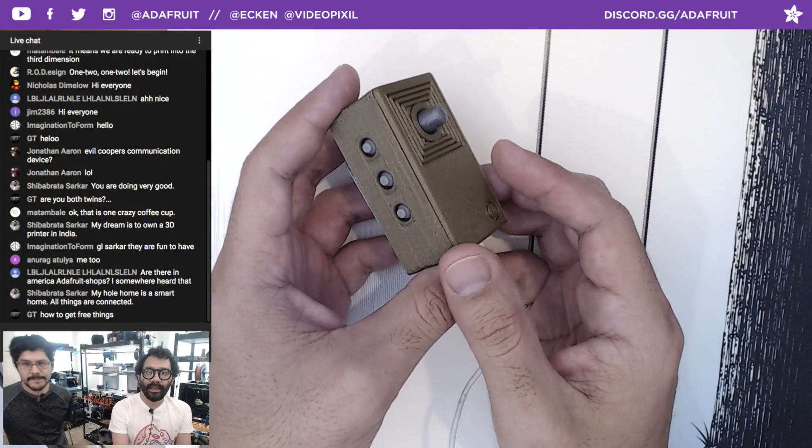So after we drink our coffee, let's go ahead and get started with this week's project. This was a lot of fun. Working on it till the 11th hour. It's one of those projects, yeah. So super fun project for this week. It is an MP3 player based on the Feather. This cute little guy is based on Gordon Cole's hearing aid from Twin Peaks.

We have access to our play, next, and power on button, as well as a slide switch. We have access to the SD card where all the storage for your music is held. And then on the bottom here, we have the headphone port and the USB port for recharging and for programming. We have a potentiometer on the top here so you can control your volume, and a nice little status LED on the bottom here to show the play status.

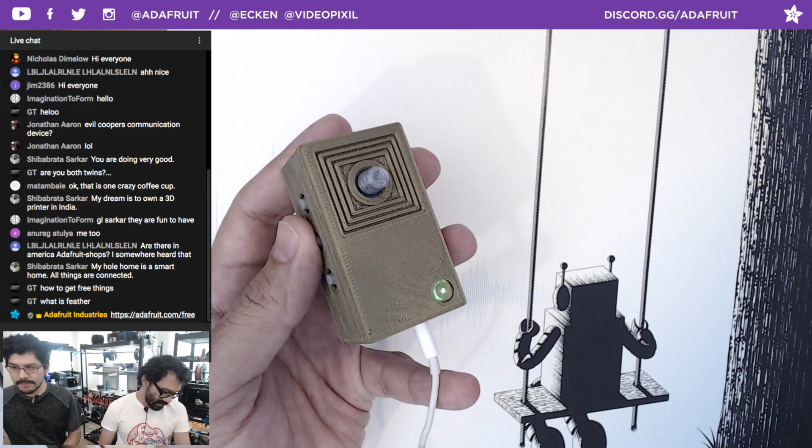So I really love this project because it's a nice little wearable, and what a coincidence, it's I think the 15th anniversary of the iPod. I know that Lamar has made MP3 players in the past, but with our new Feather line, this thing is so tiny, super cool. You can kind of hear if I hold up the headphone to the microphone here. This thing is so awesome. Wearable, nice little clip on the back here. Of course, we'll go over the design details for that. If we take a look inside.

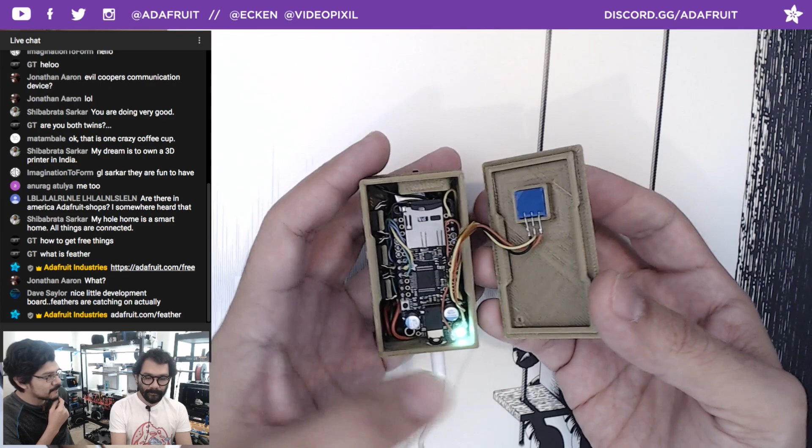For those who don't know, Pedro, what is a Feather? So the Feather is our brand of Arduino compatible microcontroller. Cool thing about this one is that it works with our brand new CircuitPython library as well, which is super cool because you can program everything by just loading it on your computer like a USB drive. So there's no need for an external compiler. It's all just text that you type in to program it. Although this one is not running on CircuitPython, it's all done in regular Arduino code just because of the speed that is required for playback.

That's right. Nice portable, built-in USB charging, built-in JST for batteries. It's very nice. It's a nice little platform. Yeah, so... Oh, look, Jim says I switched to Feathers and never went back to Unos. Yeah. So the Unos are a little bit bigger. They're about credit card size, a little bit bigger than that.

So like I was saying before, we have the play functions on the side here. The pause will give you the nice little status indication on the LED. You can hit the on and off button here, which is like play and stop. And then skip track right there. So everything is nicely contained inside this little tiny enclosure.

We have standoffs on the bottom here that are holding the Feather M0. And then right on top of that is the music maker shield, this guy right here. We have an SD card slot. You can store all your music on there, and a nice little way to hold all your buttons on the side, as well as the lid that is holding the potentiometer on there for the volume control.

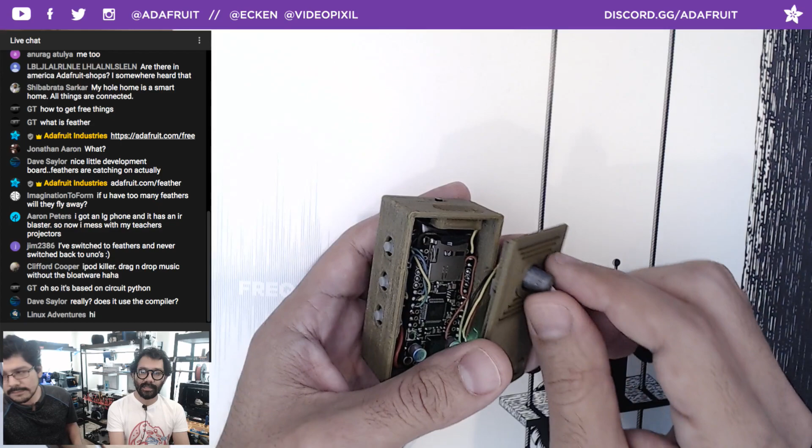Yep. Just to clarify, it isn't CircuitPython yet. No. But it is CircuitPython compatible. This was developed by Carter Nelson, who might be in the chat room. He's definitely in the Discord chat room. Yeah, this is all his idea. He came up with the design and the programming for this. I just made a pretty box for it.

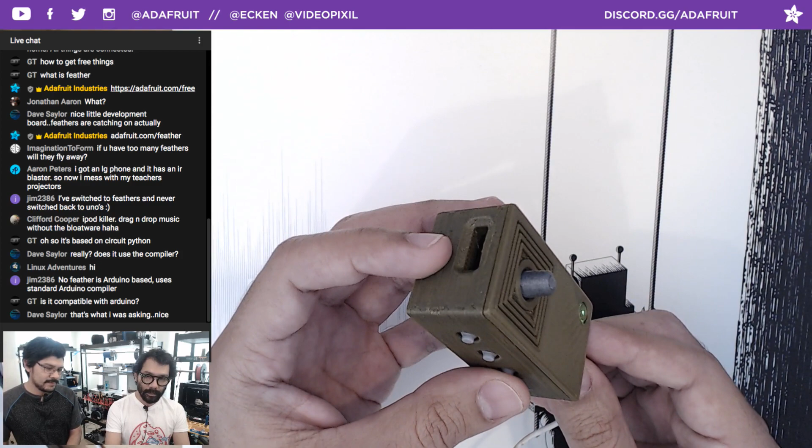Yeah, but he developed it in Arduino C, using the VS1053 library, I believe. It's the VS1053. Okay, yeah. So you can get all those details in the learning guide, which we have over here. So if you want all the details on all the components, how to set up your Feather with the Arduino IDE, how to set up the libraries and stuff, all that is thoroughly documented in our tutorial here, so you can check it out.

So like Pedro's saying, the overview goes over all of the details that you want to take a look at, including prerequisite guides, like the M0 Express. Every one of our products has a detailed guide that tells you everything about it, all the pinouts, how to power it, how to assemble it if it requires assembly, and how to set it up with CircuitPython, so you can get that started.

So some of the parts that were used, obviously the Feather, the music maker, which fits on top of the Feather, some headers, some female headers, potentiometer, external storage, so a micro SD card, a couple buttons, a switch, some LEDs, and a little LiPo battery, the 110 LiPo battery. So check that out. Those are all the parts you need. You can source them out yourself if you'd like, but we have them all over here and on the sidebar and listed here. So let's talk about the 3D printing part, since this is our realm.

Not a lot of pieces to put this together. Yeah, super simple to put together. It's just a nice little enclosure with the clip on the back, and then some replacement caps for the potentiometer. You have access to the Fusion 360 file, which we'll go into a little bit later in the show, and then just the little parts on how to orient your print. You don't need any support materials for this one, in the case anyway, because of the way that it's designed, which we'll touch base on in a little bit.

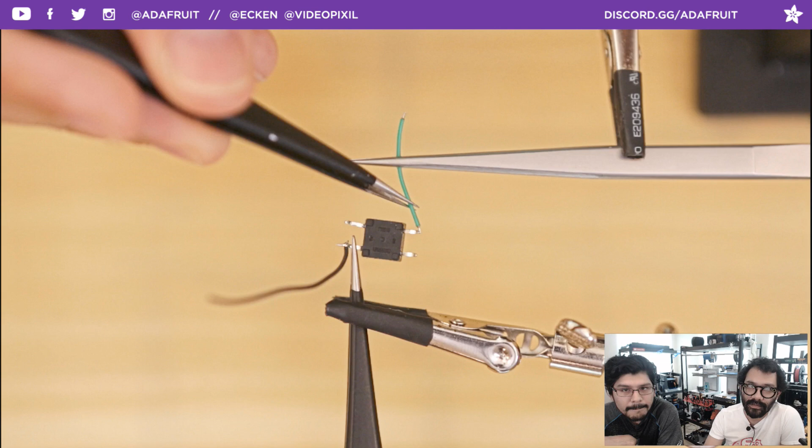If you're new to the learning system, you can click on any of these photos and they get bigger. So if you can't really see, just click on the photo, and then you can click on the original right there, which is pretty big. Probably should have done that when we were close to one of the boards so you can see all the pins. Well, you've got the circuit diagram too, for orientation.

After that, we can start connecting all of the grounds to the ground rail that we have on our prototyping area. Again, super handy to have all that space. If you needed other wires, you could attach them to make more connections on that prototyping area to extend even more pins. So super handy to have.

After that, we can start setting up our slide switch, and as mentioned before, we have all of the lengths required to reach the mounting spots inside of the enclosure. So after we've soldered the headers on, you can still piggyback off those, and I'm just connecting to the bottom there to get my enable and my ground pin. This is going to allow us to switch the whole circuit off while we're charging, so we're not wasting power. And if you have time, heat shrink tubing.

Next one is inserting into the case. So this is actually one of your designs for mounting the slide switch into enclosures. It features 3 walls that hold it together, and then a slight cutaway inside of the wall. You can't really see it in this angle, but you'll have a nice little protrusion, so you can easily get to the slide switch. I like how tiny that little guy is. And then we switch back over.

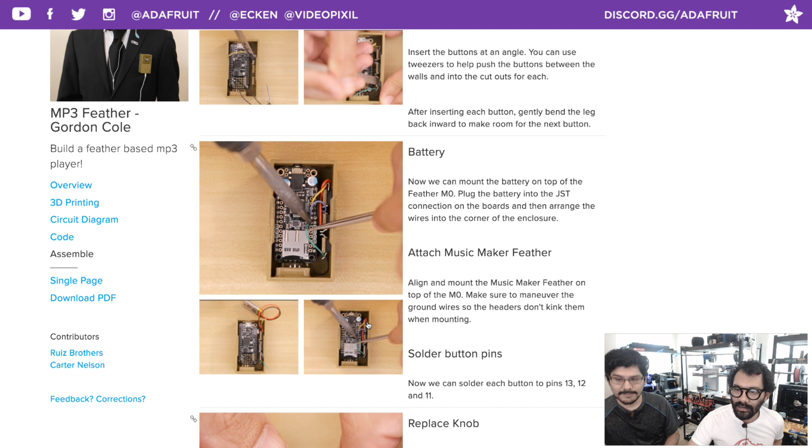Exactly. Once all those IOs are soldered up, we can move on to modding the potentiometer, which is pretty much just ripping the... I didn't think you could pop these out, so that's kind of neat. Neither did I until I tried. So we got a nice little 3D part that we can fit over that. You are going to need to switch it out just because of the thickness for the lid. You won't be able to access the stock cap that comes on that knob. So we'll replace that, and of course for the colors that we want to use as well.

And then we'll just solder all those guys up. Super easy to do. What's nice is the Music Maker has all those broken out pins, so you can access all the pins that are beneath it, right? Yes. Yeah, so that's nice.

LED status. We got it. Yeah, so for LED status, instead of using a regular 3mm LED with a resistor hooked up to it, we can use something even smaller. Surface mount for the win. LED sequins have the resistors built in, so you don't have to add any additional bulk to them. And they're so small, I didn't even really need to design a mount for this because the wires that are hooked up to this are actually a little bit heavier than the entire sequin itself. So this just pushes up against the enclosure to mount it very securely in place. And that's just going to act as our status.

Do you have a photo of that? Yeah, it's right there, after I mount it. Oh, right, because you got to mount this guy. Okay, cool. Following after that is the potentiometer, and there is a top and bottom for this. When you look at it, there'll just be a little bit more space on the bottom where the pins are, so just align that as shown in the picture there. And you're just going to want to gently bend those forward so they're nice and flat. They're not hitting. Oh, okay. Yeah, you're right. Cool. And just do a little bit of wire management there.

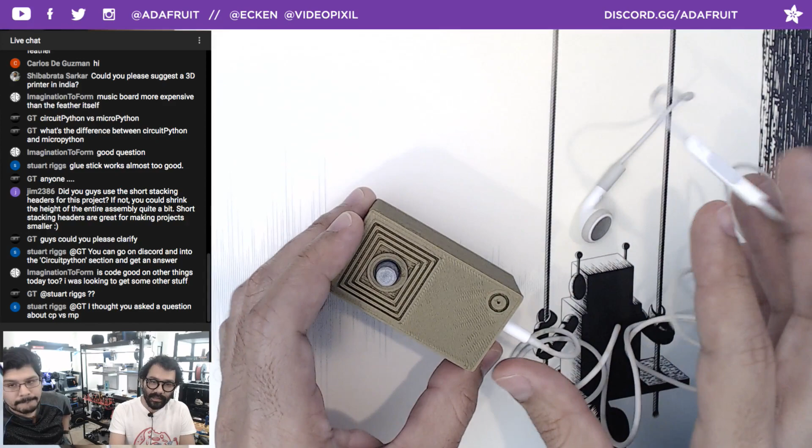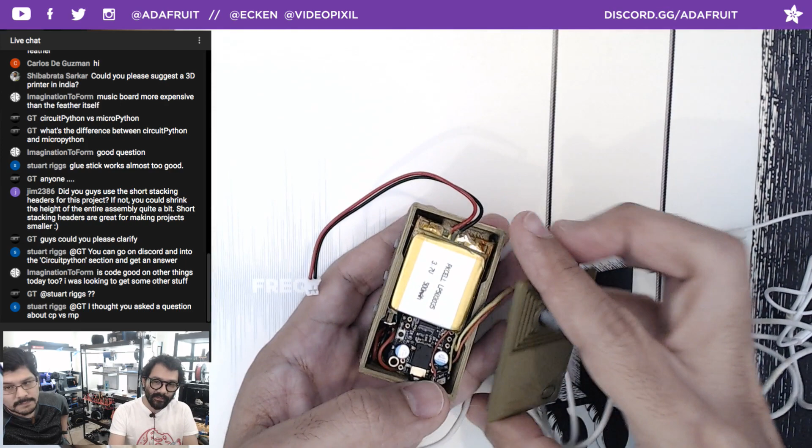So I fire up the CAD software that we use. You can get all the download links for the STLs or the Fusion files, which we should be looking at here. Super simple design. You can go through the entire timeline to check out how all of the parts were designed. All sketch driven, so if you want to update any of the dimensions, you can just type in the numbers and everything should scale with it, meaning all the holes, the mounts, everything should follow along any of the edits. Yep. Not user parameters. I didn't do that, but I thought we did. No. I thought I put a gap in there for the tolerances. Anyway, what do we want to look at?

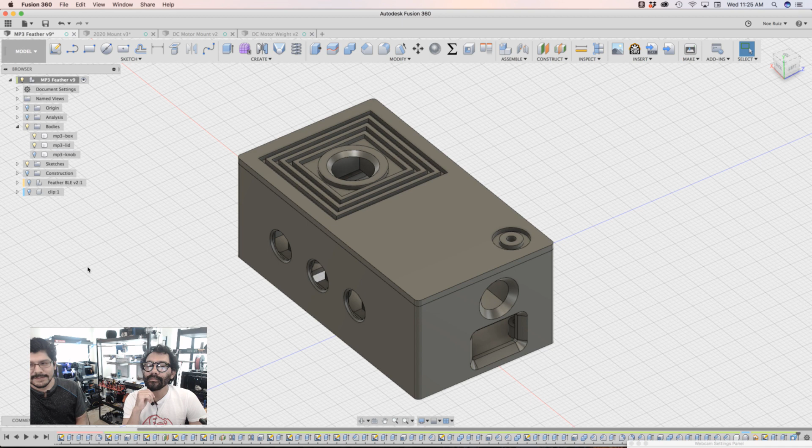The section analysis? Yeah, if you take a look at the section analysis, this is what I was talking about in terms of the way that the little holders are being held. It's like a spaceship. And there's the little chairs, and this is the window for the spaceship right there. Yeah, so that's a little cutaway that actually pushes it in just a little bit forward to the wall so you can get the protrusion for the tactile buttons out of there.

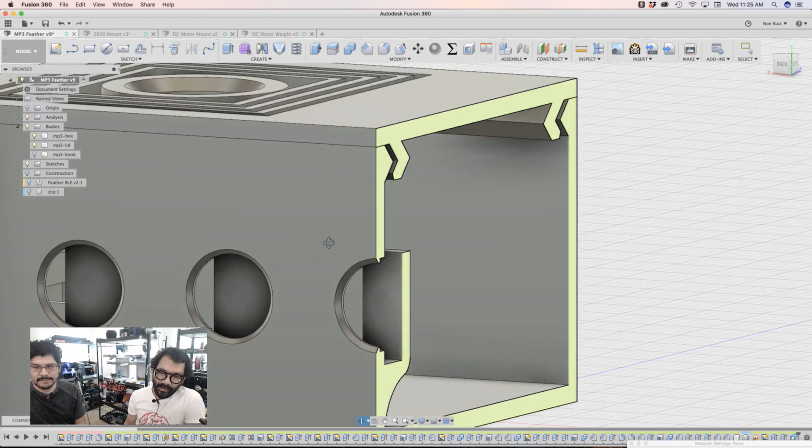I also like that you had to thin this out here, this and this, so that you can have more access, closer. See the little indent? That's what I'm talking about. It also holds the button in place. Yeah, that's the cutaway for that. And then that's also the technique we're using for the slide switch. Yeah, so that right here protrudes a little bit there as well.

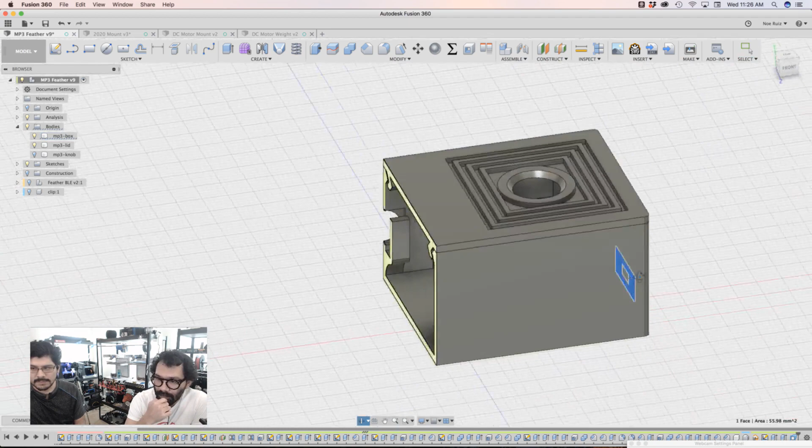And the challenge with that, can we take a look at how thick that is before this guy? Yeah, I think we can. Flip or add a new one here, like this. We can get in there. Just so we could take a look at what the minimal wall thickness is for 3D printing this on FDM.

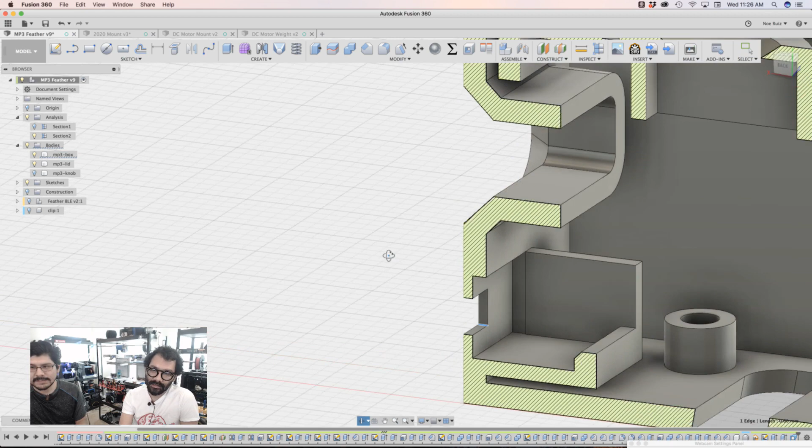0.6 should give you enough room for it to, you can't notice it, nice and sturdy, and you still are able to cut into the actual wall. So a nice little technique there for getting components to pop out of the enclosure.

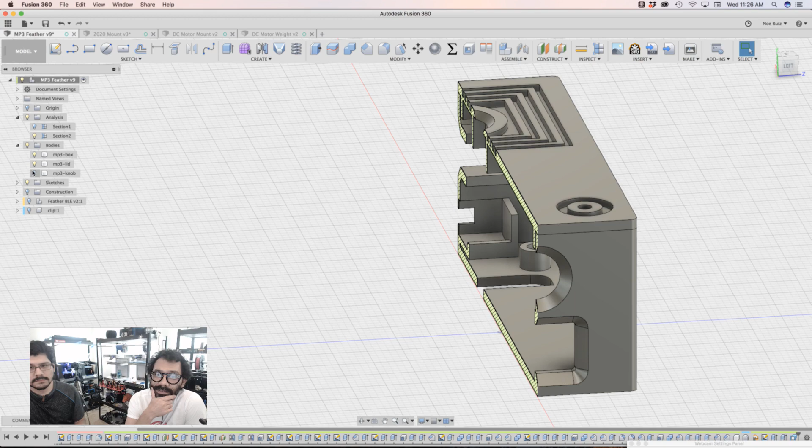Okay. The other thing we want to take a look at is a new way that we figured out how to actually make these snap fit nubs. If you can point to what those are. Yeah, so they're these guys here. Let's kind of get rid of this and reorient myself. So if you look at the case itself, you'll notice that there's these little nubs here on the side. See that nub there? It's like a little triangular nub.

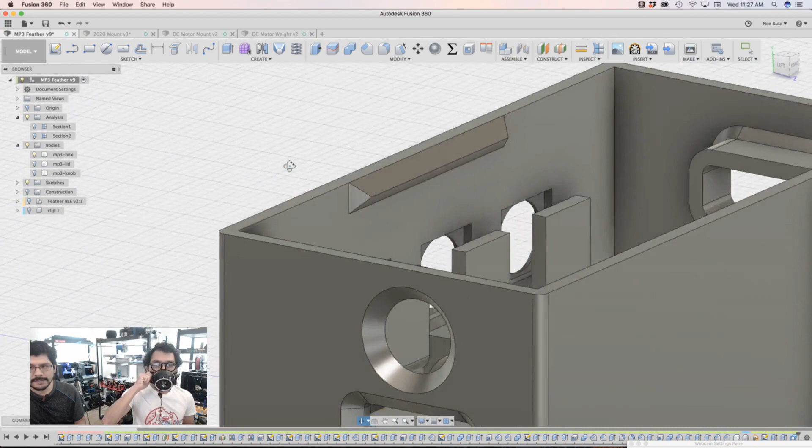And that nub there is actually optimized for 3D printing because it is at a 45-degree angle on the sides and on the top and bottoms. And then those are little nubs that lock into this lip that is on the lid. So if you look at the lid, there's a lip, obviously. This is what you normally would see, standard lip on the lid here, on the cover.

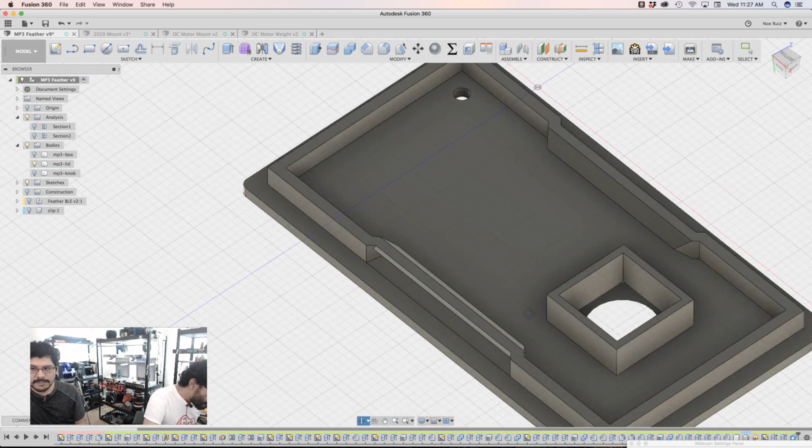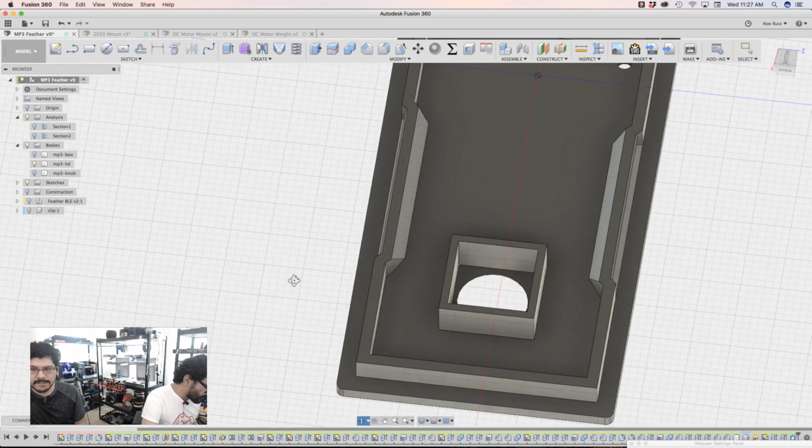And then we have this little triangular indentation, which actually is where the nub from the case snaps into. Well, in order to do that, you also need some material, some geometry to go on the inside of the lid. So you can see how this indentation follows this profile of this little nub here.

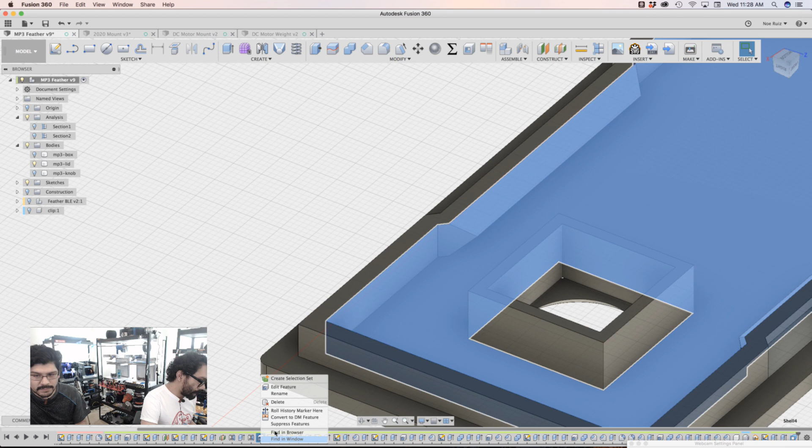So what's cool is that we learned how to do this. You can do this like 100 different ways, but the more you do it, the more ways you find to do it with less steps. So that's kind of what we did here. Really, I think one of the main steps is that you can actually apply a shell to the lid here. So I'll show you an example of what it looks like.

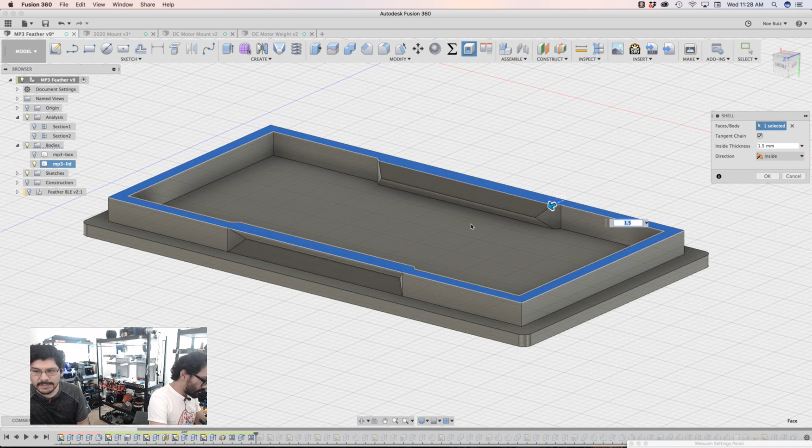So this is what we had, this little lid here. And it's fully solid here, right? This area here is fully solid. So you can just click on that and apply a shell. And Fusion's smart enough to create a shell and make the shell go around this geometry here. See the little indentation there? So it's really, really smart.

It's a better way than having to click on this, project a sketch, draw out an offset, extrude that offset, bring in more offsets to the inside here. It would take a lot of steps to make something that takes one feature. That is huge. And for everybody wondering, this is Autodesk Fusion 360.

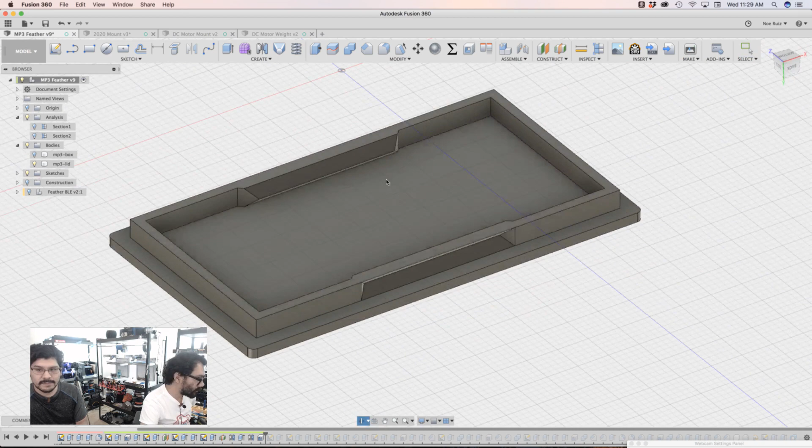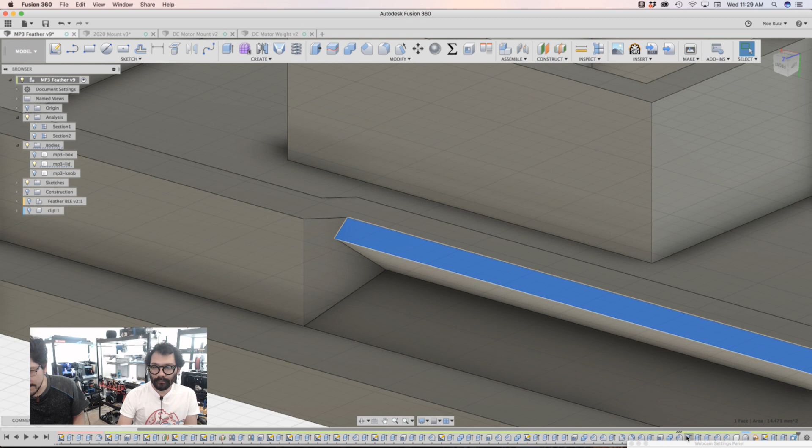So that was really fun to learn, because now I don't have to do 100 different things to make this. And one last thing is that we added a little chamfer here so that the nub can actually seat in here and lock into this indentation much easier. It's a small little chamfer, I believe it's like 0.6, 0.8. See that chamfer there? You just select that edge, apply a chamfer on both edges, and then you get this really nice thing.

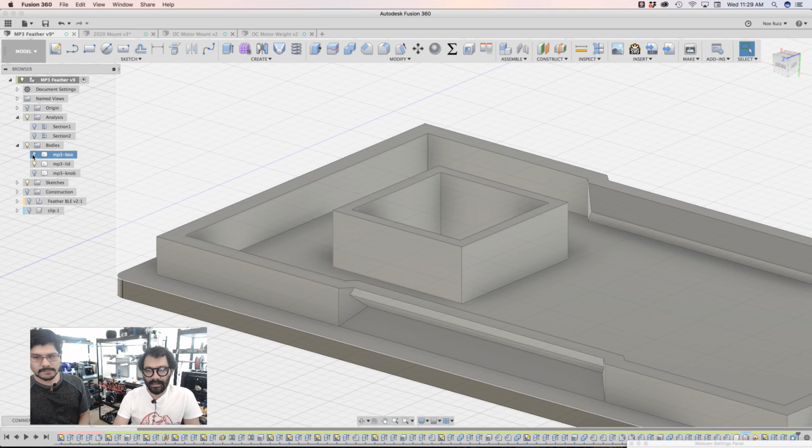Because normally what happens is when you snap it in the first time, a little piece of plastic kind of breaks. It's like breaking skin or something. First 1 or 2 layers always come off when you're snapping in the case. Yeah. So the reason we're using snap together lids is because the size of the enclosure is already starting to get restricting. Adding mounts for screws takes up a ton of room inside.

You notice that there's a really nice gap here. There's about a 0.8 millimeter gap, and that's just the tolerances that work well with the Type A machines. But they could be as low as 0.3, so you can change that if you want for your printer. It's all in the sketch.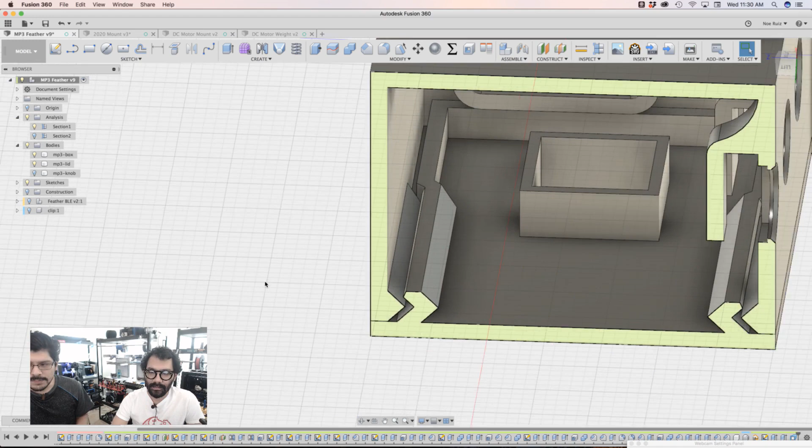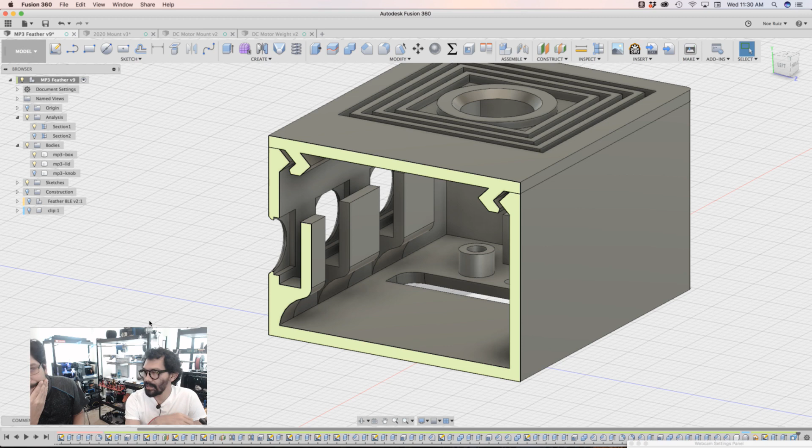So that's just a quick look at the CAD and this design. Hopefully this inspires folks who do CAD with some different ways to approach geometries and mounting features. Yep, you can always rip these features out for any of your own designs as well. If you go through the sketches, you can look at what the measurements are and redraw those to recreate in your custom enclosure.

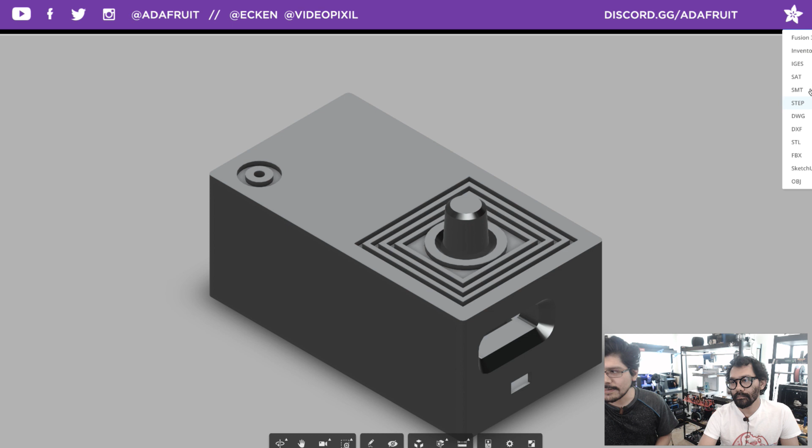You can go to 3D printing, and a lot of people don't know really, but it's over here. This link, it says download Fusion 360 source, and when you go there, it'll load it in Autodesk's My Hub thing, and then you can download it by this button up here. There's like 10 or so, SolidWorks, Inventor, SAT, STEP, DXF, STL, all the ones you like, OBJ, SketchUp. Google SketchUp, really? Wow. Pretty cool.

I like the explosion view feature. It always explodes.

Cool, so check it out. That's this week's project.

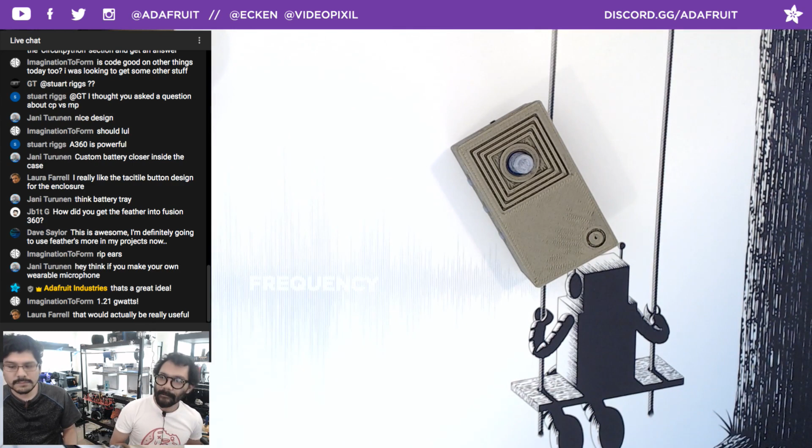All right, cool. Now we're going to take a look at Shop Talk. Yes. Cool. I got a Shop Talk. Hey guys, you know, ever since I saw John Park's pinball project, which is right here, I got interested in the stuff that he's using. So he's using slotted aluminum extrusion. If you scroll down to this product page, you can see John Park's pinball. If you didn't see that, check it out. He did a live stream on it and a full tutorial on it.

Basically used this 2020 extrusion to make the framing of this, and I've been thinking about doing something with it. So I finally figured out what I want to do with it. I made a hat holder. So what I needed to do was find out a way how to model this thing, and I was looking around on McMaster-Carr, which is this great hardware place that has all sorts of hardware and stuff. So I looked, and they did have some 2020 extrusions, and I imported it in, because there's a plugin built into Fusion that allows you to do that.

So I modeled this wall mount because I wanted to mount one of the rails to my wall and put hats on it, and it was wrong. It was the wrong size. I didn't know that. They're not all created equally. So even though they're 2020 on the outside, on the inside those little slots actually differ. So I was searching around, and I found on GrabCAD this gentleman here, Mark Kenworthy, designed, well, look at that, Adafruit 2020 extrusion profile.

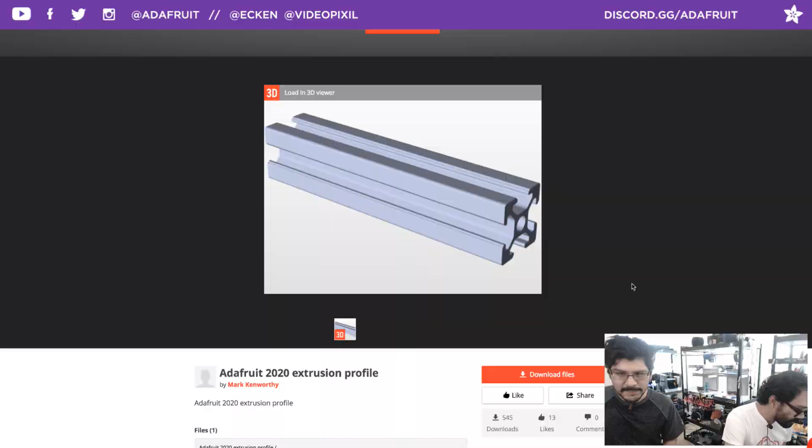So I just downloaded his file. It's actually a SolidWorks file, and I was like, "Oh, great, SolidWorks. There's no way that's going to work on my CAD package." Guess what? Fusion has native support for SolidWorks, which is awesome. So I imported that into my Fusion 360, and I made a little mount, which I'll show you now. This guy here. I imported it in the component, so this is the profile. The measurements are spot on. They are exact. So the diameter and all the slots are all perfectly lined up.

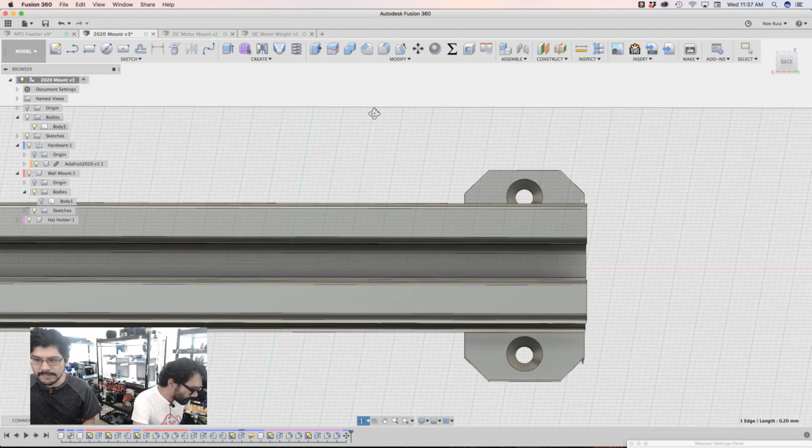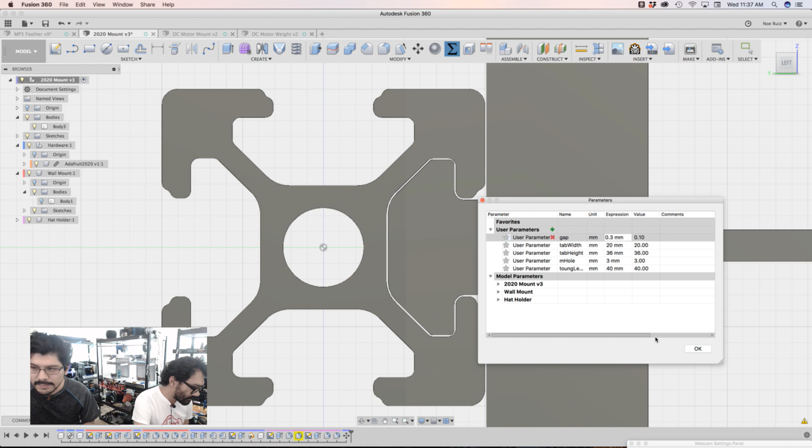So I made this little end cap piece that fits into the wall, and that's how it works. It just has two mounting holes, one at the bottom, one at the top. And then this area here is just a gap, so there's a little bit of play. I set up a little user parameter, 0.3, so I can adjust this. So watch me, if I put 0.1, you'll see the thing grow a little bit. And then if I put it back to 0.3, you get a better visualization. Obviously one of the fillets broke, but that's fine. Just switch that back. There you go, you can see the gap, so that's really important, to have a built-in tolerances user parameter.

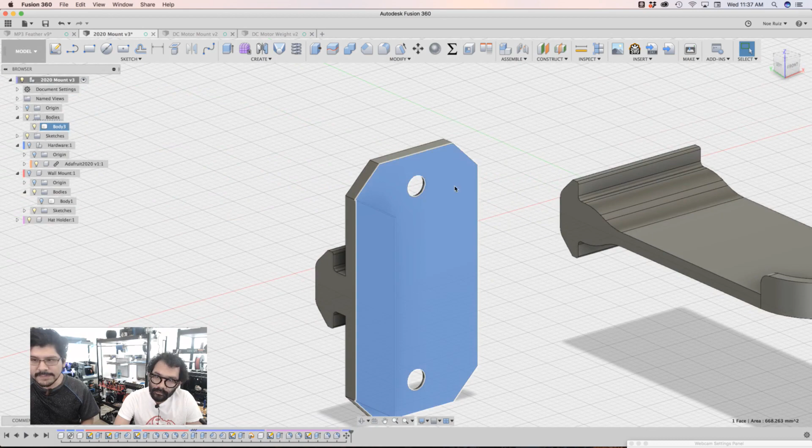But anyway, one of the tips that I found out is the way to print this guy, let me hide this for a second. The way to print this little guy here was, okay, if I print it flat on this side, I'm going to need support materials for these overhangs because they are 90-degree overhangs, right? Those are problems. So I printed it on this side, and so I have this weird flaky platform. You can see the thickness of this platform is 0.2 millimeters, which is one layer.

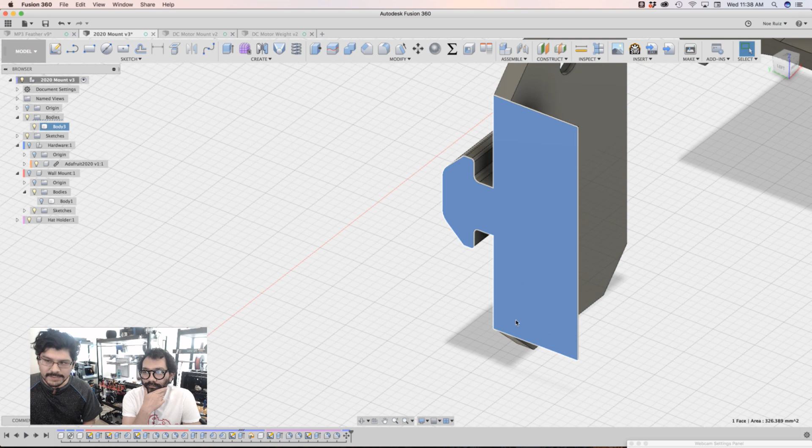So I made this kind of built-in support thing. I just cut it off. I just snap it away. And then I have chamfers here so that I have not too sharp corners. Could have probably put fillets, but it worked out really well. And I also did this little tongue thing for my hat holder, and it's using the same thing.

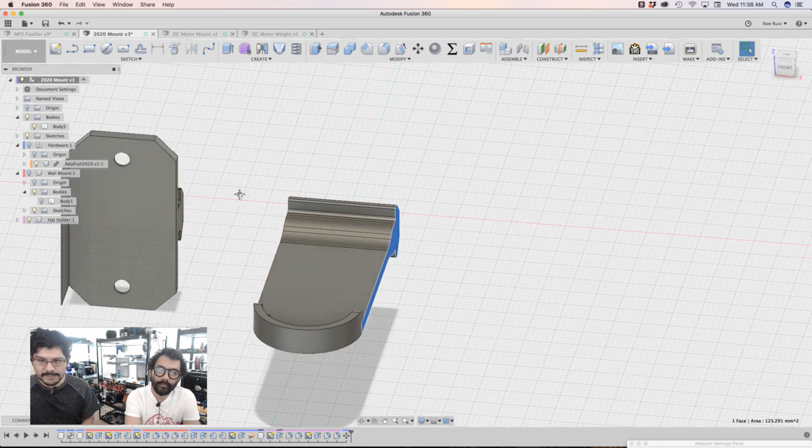I print it on this surface, and then this fillet here just prints out nicely thanks to the cooling fan on the printer. And that's kind of my two little practical prints that I made. So what does it look like?

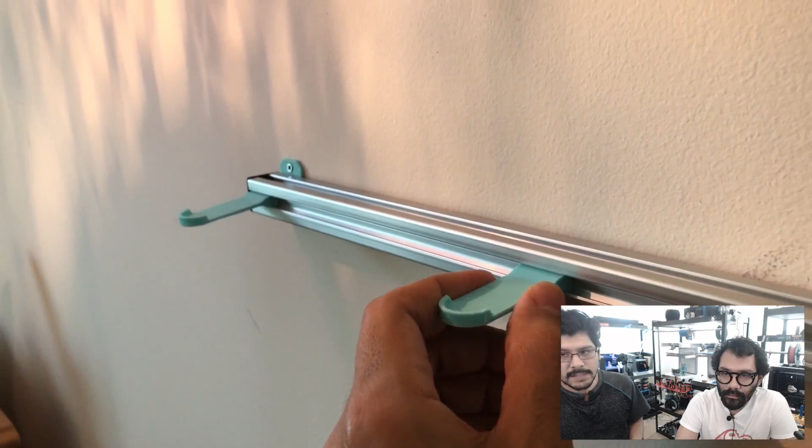It looks like this. So I mounted it to my wall with two wood screws. They're really small and they're pointy, so they kind of self-tap. And there's a little bit of play, so I can move these and slot them around. And I can hang my hats, I have a bunch of hats. And I was able to fit 4 hats there. And I probably want to do another one, so I have like 2 rows of them.

So I don't know, it's just kind of a practical 3D print. A little bit of Fusion work. Again, huge shout out to Mark on GrabCAD, who uploaded the profile, so I didn't have to spend too much time sketching out that profile for the 2020 extrusion, as it is a custom thing, I think. I don't know, maybe it's not custom. I couldn't find it on McMaster, like the right size. So, yeah. Super handy. Pretty cool.

And shout out to John Park, who gave me the idea to use 2020. They've been in the shop for a long time. It's like product number 500 or something. And I just never used them and never had a need for them. But it's really good, it's lightweight, it's super strong, it's aluminum. You can cut it with a hacksaw if you want.

And yeah, it comes with all the handy little cap end pieces. You don't have to print those out. You kind of have to buy them separately. Oh. Yeah. So I put those end caps on there. Yeah, so you can grab those. You got a bunch of different things too. Yeah, so that's the whole point, is to kind of design and make your own.

What I'll do is I'll probably upload these to Thingiverse so people can download this as an STL in case they don't have SolidWorks or Fusion and they want to do some CAD stuff, like Tinkercad, for example. You can import the STL and make your little cool gadget thing. But yeah, I think there's a lot of different use cases for this. So let me know if you guys have any ideas on that.

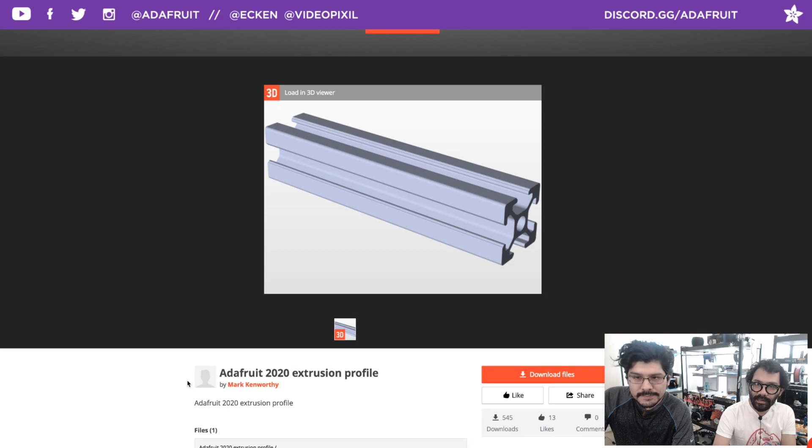Cool. And that was one segment of Shop Talk. I think that was it for Shop Talk. We're running out of time, so we need to jump out of what we're working on to, I think, Community Makes. Is that cool? Yeah, this week's Community Makes is this guy.

It's a cool little huggable, cute ghost. Yeah, this is awesome. So this is featured on Thingiverse right now. It's called the Cute Hug Me Ghost. It is designed by the folks over at gCreate, which is a 3D printing manufacturer, they make big printers. And they kind of remixed this as a concept. This was like the original concept, and they were like, yeah, this is a really cool concept.

So it's like your traditional ghost that's draped over, and he's completely hollow. There's nothing in it. So it's a really cool design. So we thought, hey, let's add some electronics to it. So here's a little guy printed on the BCN3D Sigma.

Yeah. So the only modification that I made to this was add a motor and an LED on the bottom with a nice little mount that holds both of these in place, and then a 3D printed weight to allow the sort of shaking that's going on for the movement that you see in the video. So I'll switch that on real quick.

See that the nice little weight here is actually what's doing all the... Whoa, this is so cool. Yeah, and of course it looks way better at night. It's a Bristle bot. So you folks heard of a Bristle bot. It's a great little project to get kids involved and started with STEM projects and technology in general, electronics.

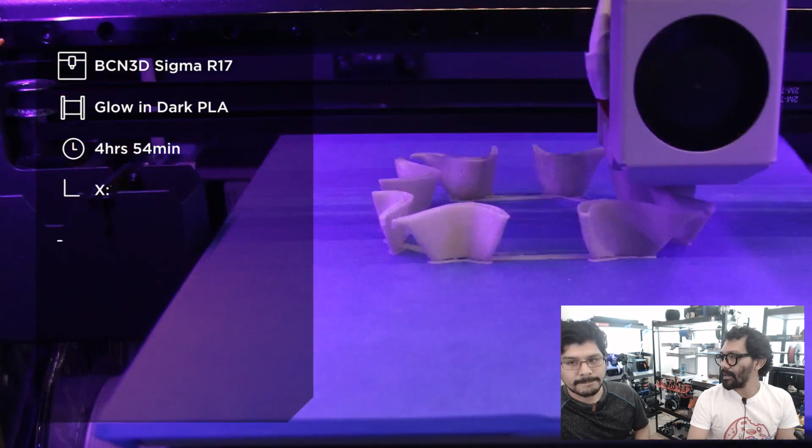Let's take a look at the video. So if you didn't see it, you should see it. Of course, we're using the PLA PHA glow in the dark. Yeah, so we'll get that extra bonus of glowing in the dark. Really cool. This is just dying to be a Bristle bot, you know? Yeah. Because it's all about the bottom surface that's touching the table, and it's just enough to vibrate.

You definitely need a 9-volt battery. We tried this with a coin cell, didn't work. And anything like a AA battery holder, it was just a little bit too big to get in there without modifying or scaling up the design, which I didn't want to do. Yeah. So this is 100% scale. This is 100% scale. Yeah.

Cool. You see here with the LED on, some black lights on it, you can kind of see the glow in the dark. I don't know why glow in the dark doesn't work on camera, any camera. It's weird. It's like only the human eye can look at it. You can see it there. Oh, it's intense though in your human eye. It's way better. It's really bright. All right, we're gonna try to pause this when it cycles here, but yeah, pretty fun. You want to use a fresh 9-volt battery as it tends to drain.

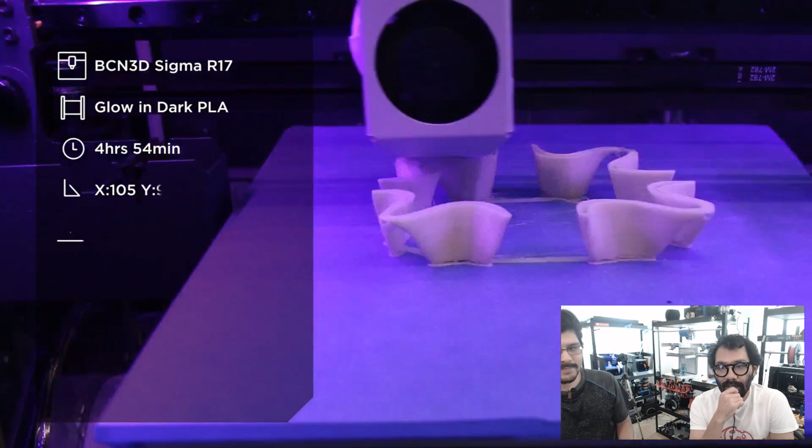Yeah, if we take a look at the CAD though, if you ever want to use any of these mounts in any other project, I would take a look at that. We don't have it out yet, right? No, we're going to the Fusion file to take a look at. Yeah, I'll upload this. That's what I meant. Sorry. All right, so it's actually pretty simple.

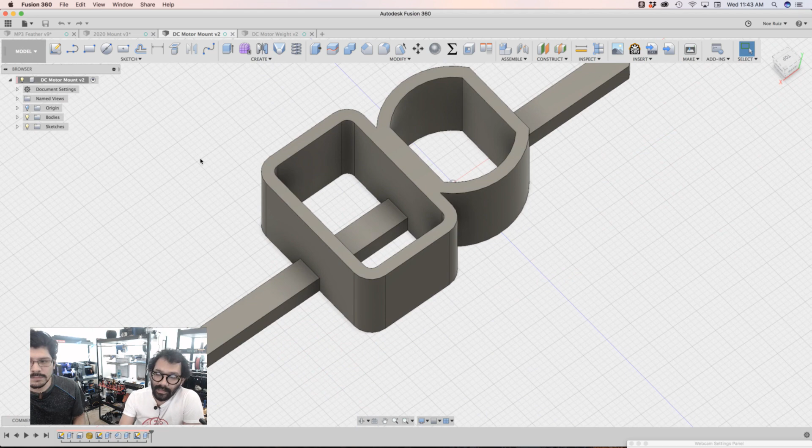Here's a little profile for the 9-volt, and if you want, the DC motor as well. So all they do is just snap into place. And because of the components that are on the back, it won't slip through, even with all the vibration going on. And then you could just adjust that holder to whatever size you're mounting this inside of.

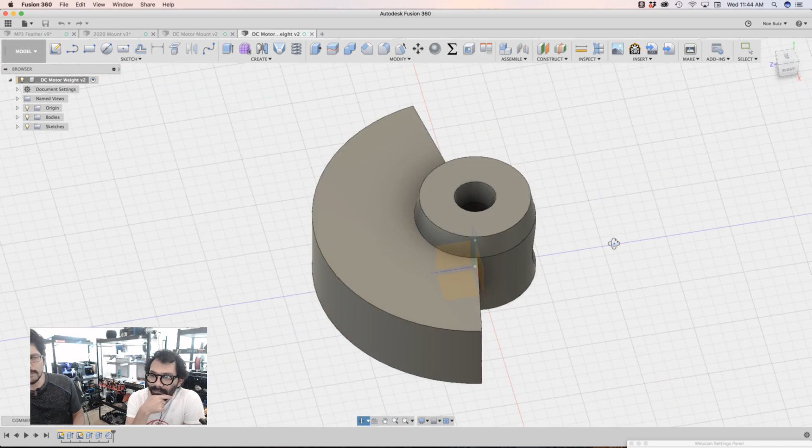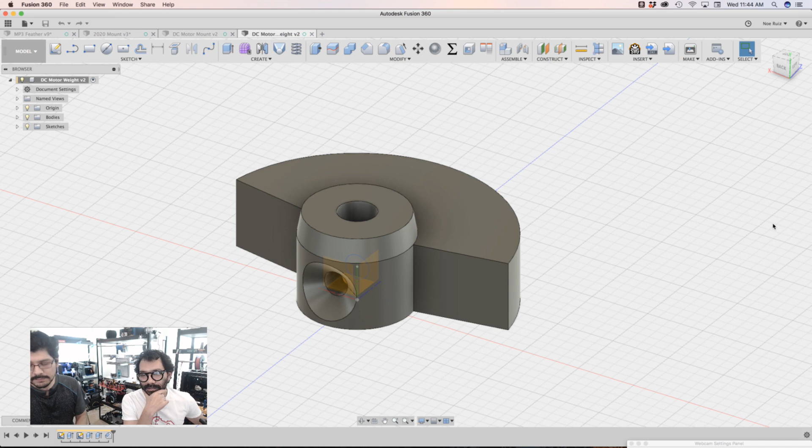Tell me about the weight. How did you come up with this? The weight was just a little bit of testing. I took a look at the included horn that some of the servos have, and then measured the tolerance for fitting it onto the shaft. By default, the DC motor is just a shaft, and there's nothing to move anything. So you have to stick something to it in order for it to move. And I added a little grub screw on there if you need it. But the tolerance was so tight that I didn't need it at all. But it definitely helps save material.

And then you do want to print this with a 30% infill just to add that weight to be able to actually shake. Because even though it looks small, there is a bit of weight on here, which is why we needed the 9-volt to give it enough power to actually move it. Because otherwise, it's just going to sit there making noise. It's not going to move at all. Right.

Again, the whole theme for this entire Halloween season was 3D printing something, adding electronics to it, modifying it somehow. We do this every week. Yeah, it's great. To actually make it do something instead of just printing it out. You can add some life to it with a simple LED and a coin cell. Exactly. That was the point. And then we gradually got a little bit more like, okay, let's add a servo. Let's add a motor. And it didn't take too much time, just figuring out the tolerances for getting this guy to actually vibrate the entire thing.

So definitely take that as a challenge for when you're 3D printing another Benchy or something. Maybe add something to it. Add lights to it. A Benchy Bristle bot would be pretty cool. That would be pretty cool. Yeah, or make it actually float, or do some modification to it that pushes you to actually learn something new.

And I like how gCreate actually posted their original idea, because this is a custom design. They didn't remix this design. Yeah, if you look at the remix, they still gave it a good shout out. Yeah, which is cool. This is the original Ghost Toy idea by TC Flea on Thingiverse. So shout outs to gCreate for being nice and crediting, because we didn't come up with the idea, these guys did. So that's why they posted it as a remix. Really cool. Well, I guess we'll have to post it as a remix and then upload our mount, because you designed it.

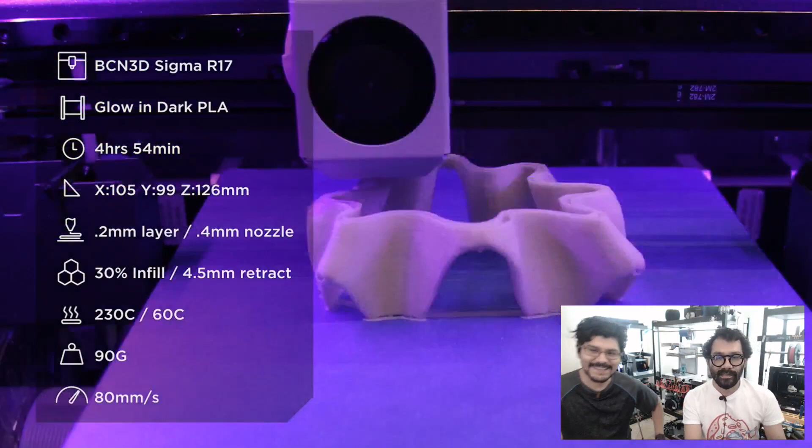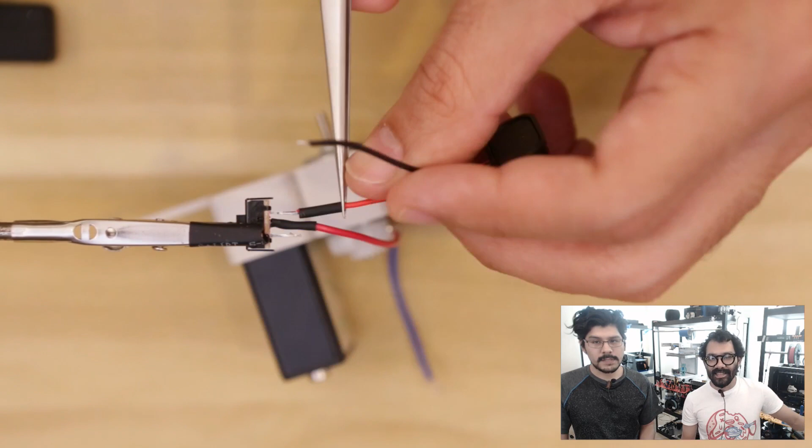So definitely challenge yourself to add some electronics if you're doing these 3D printing time lapse type things. Add something more to it. Modify it. And making it huge is not a modification. Add something to it. Modify it. Change some geometries. Yeah. Music Maker.

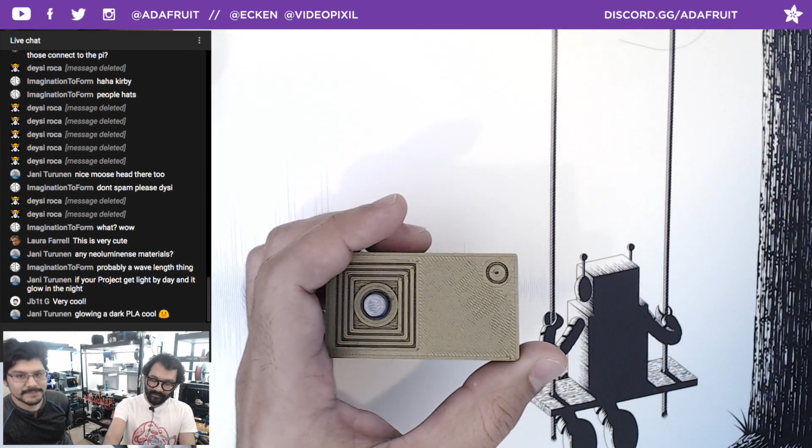Moving on to the next segment. Oh, actually, no, we're still in the segment. If you want to go through some of the cool makes we caught in the Discord channels this week. First, we're going to look through some stuff we found. Scoured the internet, found some interesting projects we want to share with you, because we got about 10 minutes left in the show, so let's do that.

First up, you know we like light up swords. This is a sweet prop by Forrest L on Instructables. This is the light up sword from the Transistor game, the Transistor Sword. Very cool. Combination of 3D printing and I think it's CNC milled. Ooh, there's acrylic on there. Nice documented Instructable here. So 3D printed stuff, some metal working it looks like. Some wiring management stuff.

I was about to say, you just crashed my website. Thanks a lot, Instructables ads. I need to install Pi-hole. I totally need to install Pi-hole.

He designed it in Fusion 360 apparently. But yeah, this acrylic thing is super, super cool. So check that out. I'll have it linked below.

I'm going to have to close this because the ads are killing me. Yeah. The ads are so great. The ads are too high up in here. Look at these ads, dude. They're killing my system. I need Pi-hole now.

This is a cool design by Jonatron. Jonatron makes amazing projects. He is a resident at Instructables. He works at Instructables, but he's doing some great work. So this is a 3D printed linear motion using a screw or a drill.

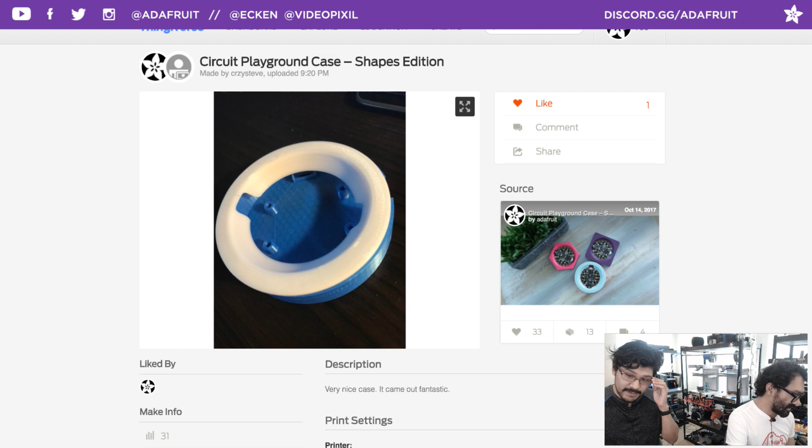This one is a make. Do you guys remember last week I released a Circuit Playground case? Crazy Steve on Thingiverse posted his make and said it was very nice. I appreciate that. I haven't seen anyone else build it. He printed it on his CR10.

Hey, I've heard of that printer. A lot of folks say good things about that printer. Very nice case. It came out fantastic. Well, thank you so much for sharing it, Crazy Steve.

You're so crazy. This is a light up sword. This is your Guardian sword. This is a make posted by Hansaya on Thingiverse. Very, very cool. Printed on a Prusa i3 MK2S, 0.2 resolution, 20% infill. I'm out of breath. Very nice. Next to his impressive Master Sword. It's like bigger. Cool. What was the Master Sword version that we saw that you could light up? We shared it last week, I think, or something.

Wow, I look at swords differently now. If it doesn't light up, it's not a sword. I don't think it's that cool. It needs to light up. That's just funny. Yeah. Or be made by Volpin Props. Or Core Geek. Or Punished Props.

This is a Raspberry Pi Game Boy. This is the split version, so if you can't fit PiGRRL on your bed, you can download the split version. So thank you so much to Arisen1 for posting this and saying, hey, I figured I'd post the picture because it's going to take a minute for me to build it. Very cool. She brings the pieces out.

So specifically, these are designed for something like the M3D Micro or the Monoprice Select Mini. There it is. It's like a $150 printer. Actually, no, it fits on the Printrbots, right? Yeah. Not the smaller one, the Play. Printrbot Simple Metal. It'll fit on the Simple, yeah. Cool. We got a lot of PiGRRL stuff today.

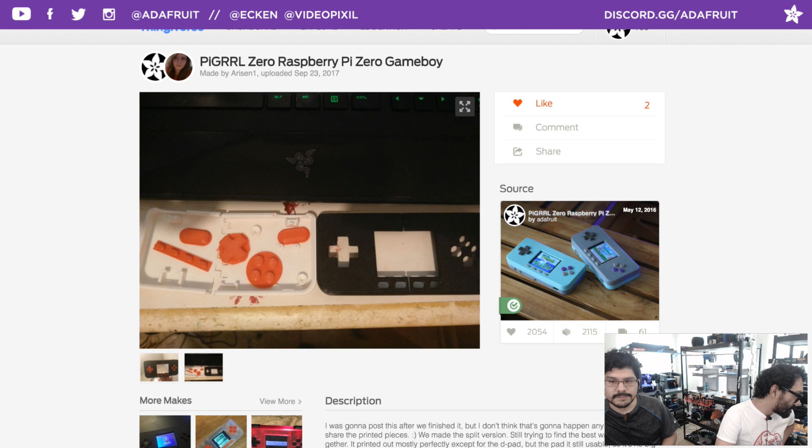This is another PiGRRL uploaded by Grow Pi on Thingiverse. Printed in black TPE. Not much info about it, but it looks really cool. And it's fully working. I think they sanded it. I like the stealth black mode. Yeah, it looks great.

You got another make. This is Boomy, the boombox. Yeah, this is self-painted. I kind of like that painted look. It looks pretty neat. It looks like chalk almost, doesn't it? It looks really cool. So this is by JB Nuck on Thingiverse. So thank you very much for posting that. Oh, he's got a GitHub project. Oh, that's sweet.

He made some modifications to this. He added an IR sensor. Very nice. And he put a bigger battery. Yeah, because my constraint was use all the stuff that comes with AdaBox, but of course you can add stuff to it. So, sweet. I did not know that.

This is really awesome. This is what we want to see, this type of contribution. Modify, add to the project, please. Because I'm sure he's got another GitHub repo, and in a way that's kind of like building up your portfolio of your code. Let's check it out. So huge shout out to Joshua, actually, who made that. I'll link that down below too. All right, so that was Boomy.

Next one. Super handy. This is the ESP Weather Station. Everyone loves this thing, by Squix. I believe he's the developer who wrote that. It's great. This is a Gothic themed one. Oh, there's a Gothic theme one next. Oh, that's why I even thought about it. Check this one out.

This was a great remix by an 8-year-old maker. Really love the design and theme of this. Very appropriate for this holiday season. Really cool. So you can check that out. Here's a nice picture of it. Love everything. It looks really cool. A nice theme. Nice paint job too. By Purple Orangey on Thingiverse.